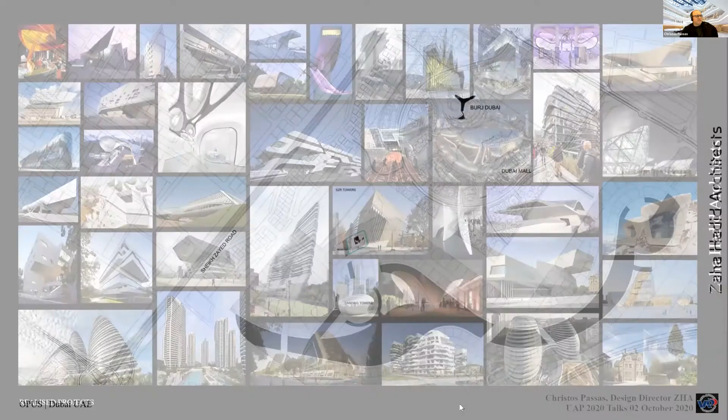So I'm going to go a slide back to show what I was speaking about before, which is the portfolio of our projects. As you can see, each one of them is a unique architectural expression — the Business Bay with the creek that allows all of these buildings to have a good community of buildings around the water. And this is the Opus, in close proximity to the #1 landmark in Dubai.

What I was saying is that the city of Dubai decided to allow for ample space around the Opus, and that gives it a certain privileged position within the urban fabric of Dubai.

When we first started, this relationship between the Burj Khalifa and the extended urban fabric of the city necessitated a project that we thought should be unique. If you look at some of the buildings next to it, they're still characterized by the initial master plan developed for Business Bay, where each building on these lots was meant to have a parking podium on the base, and then a tower or two towers sitting on that podium. That's where the architectural story of the Opus starts, because this project is all about wanting to eliminate the podium and free the building from that big parking infrastructure, allowing it, for the first time, to be a freer, freestanding building.

The idea was to take the two towers, which were part of the original master planning document, and instead of doing a twin tower project — the planning conditions would have allowed us to build a project 30 stories high, with two towers on either side of the atrium, as you see here.

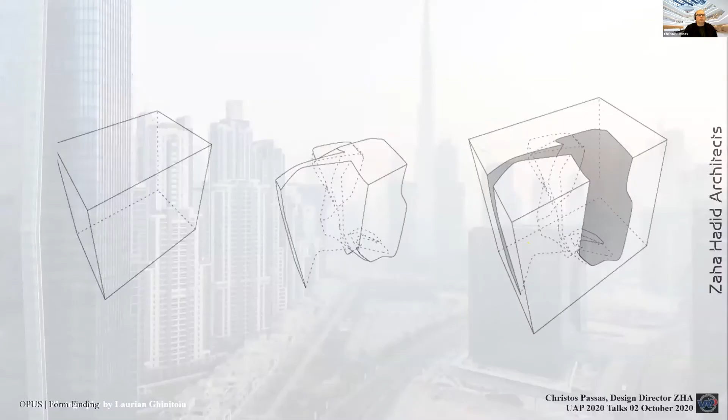Instead, we decided to depress the overall height of the building, and by creating a bridge and a connected podium roof on the bottom side, we were able to achieve a building that appears more like a cube sculpted with a void. That allowed us to create an object that speaks about a number of things, but predominantly about this relationship between solid and void — those two eternal opposites that are always in some sort of coexistence.

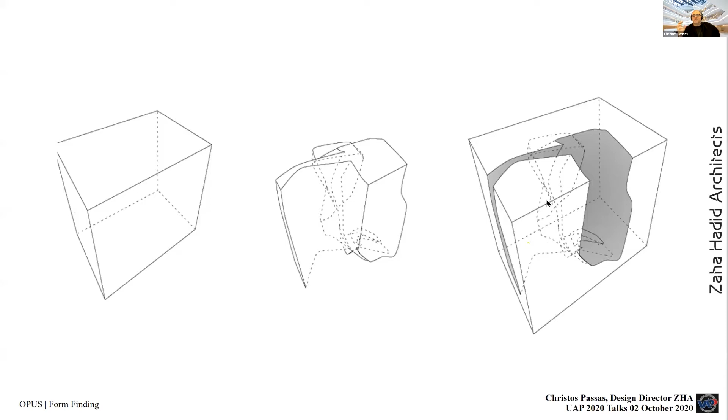What we feel this project does is also use its own form to create a certain amount of self-shading, which is important for Dubai. But also in retrospect, and I'm thinking about this more and more now, having been with this project for almost 15 years, is how it's also a kind of prototype of a three-dimensional urbanism.

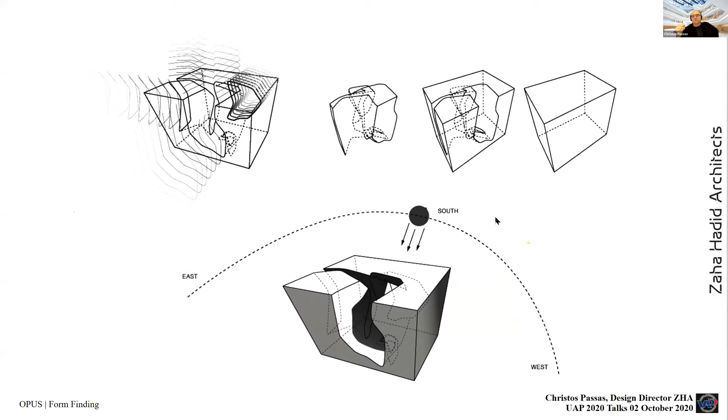This bridge that connects the view between the two sides of the building gives us the opportunity to think about this as a loop — a sectional loop that allows the movement of people inside this building to use it as a continuum instead of a dead end structure like a tower.

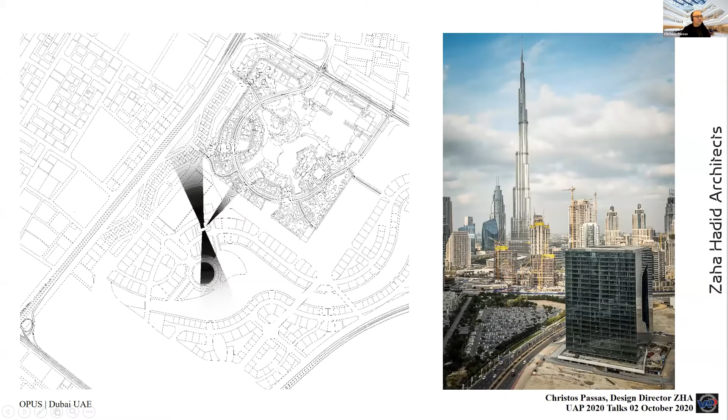And of course, the placement of the void allows us to see north and south — through to the desert on the south side, and through to the sea on the north side — and with the windows on the side, we could also take a view toward the Burj Khalifa, so we could enjoy these spectacular views toward that incredible monument.

Another aspect in the design of the Opus is also its facade. Besides the void and solid contrast, which was a very interesting instrument for us to give sculptural form to what is otherwise a simpler volume, there was also the treatment of the facade.

From very early on, we started experimenting with ideas of facade as effect, but also facade as a veil and as a reflective element that would enable us to increase the solar insulation of the building from solar radiation, to an extent, to enable this building to have a kind of an all-glass facade, but one that is articulated and ever changing.

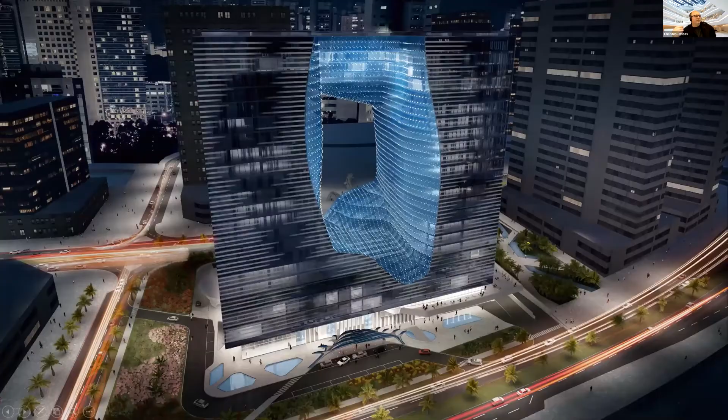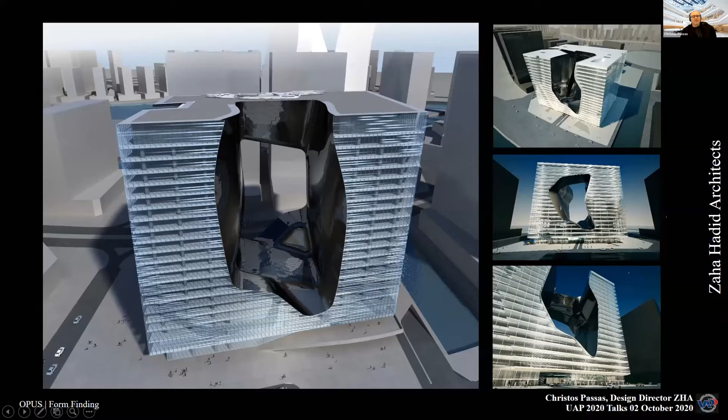It becomes an element of light, an element of visibility, versus the daytime, where you have a volume that is much more visible as a solid volume during the day. That relationship between the void and the solid, the day and the night, is a theme that we've played on quite a lot, and within that, the idea of the highly defined geometrical edges that hold the project together gives this extra meaningfulness and significance.

These are some test models that we've done once the concept of the project was finished, and that shows the cube as a chromed object with a series of self-reflections appearing onto its void.

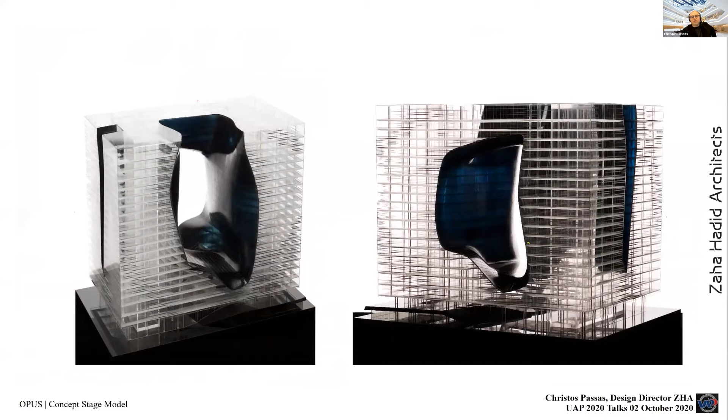I think that is also important when we come to speak about how the facade was developed. This is another model that shows the structure, the floor layout, how the building internally is organized and proposed.

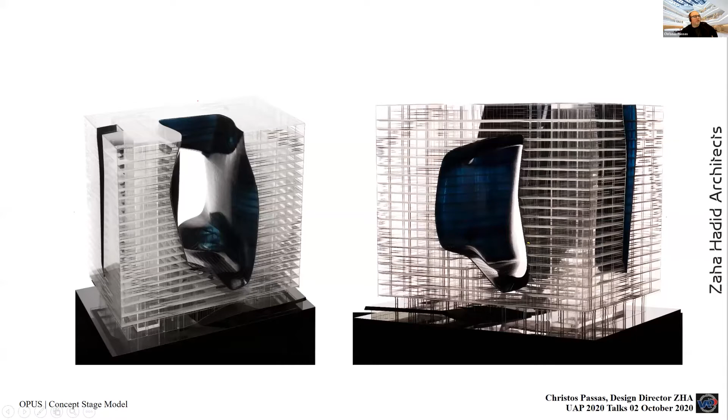We're speaking about a kind of a domino system, but except at the edges, and the point of incidence together with that internal void becomes a point of interest where all of those columns begin to bend, and all the slabs begin to take curvilinear form out of the shape of the void. That is to say, from an architectural or tectonic point of view, that void is a matter of design, both in terms of rationalizing the facade, rationalizing the interior of the spaces, and thinking about how the whole building is developed.

Originally we had started with the Opus as a building that would have a retail zone on the ground floor, and that was actually quite important for the client. This is a roofless plan of the two levels on the ground that were to host a series of shops and other public facilities. That was important for us because it would reinvigorate the idea of the sidewalk and make the building approachable, rather than unapproachable, by the placement of those parking lots in the podium that I spoke about earlier.

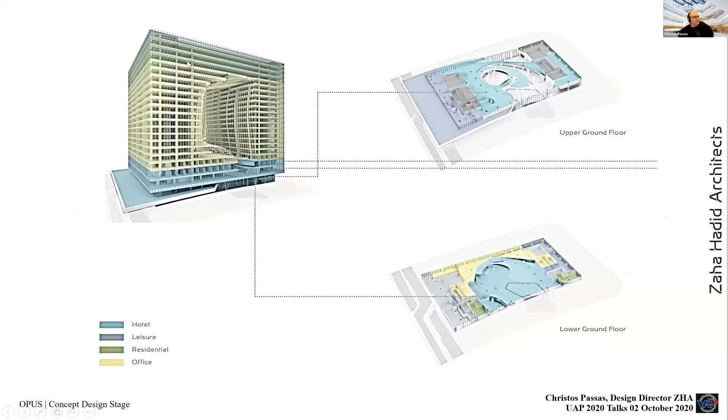Above the podium levels, we had a number of floors here in yellow that show the areas where the offices are developed, and then at the very top we had penthouses and so on. Later on, during the course of the development of the project, the client decided to transform the ground level and install a hotel function, which was equally interesting in terms of its public urban space outlook, and transform the penthouses into a series of service apartments at the very top.

So we went through the building volume at that point, and we looked at how this three-dimensional building structure, or three-dimensional urbanism — the office zones, the hotel zones, the apartment zones — are all becoming one mechanism that allows this building to tick-tock during the day.

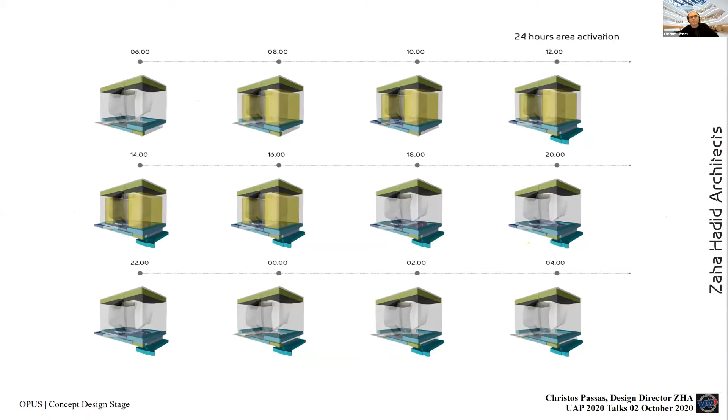Looking at it more carefully — this is an instrument we usually do to understand the buildings we design better — was also how the building functions over a 24-hour cycle. We do this both with our master plans and with our buildings now, to understand how the flow of people through the building begins to change, and what areas become more active or less active during particular hours of the day.

Here we have a section that shows essentially the solution to how to build such a project. This section is quite crucial. It's a very interesting drawing from the point of view that it does lay the whole structure of the Opus bare to see, and the overall building is sitting on a raft foundation.

It has a number of basement parking levels. This was the podium that was supposed to be above ground before, and we depressed it into the ground. There are some loading facilities here in the back, but the main atrium was always part of the main features of the Opus, and this was a sort of space of surprise, entering into the building and discovering what the Opus was about. What's interesting about this atrium is that the glass roof on level 3, 4, 5 can allow you to see through over to the bridge and all the way up to the sky from this point down here.

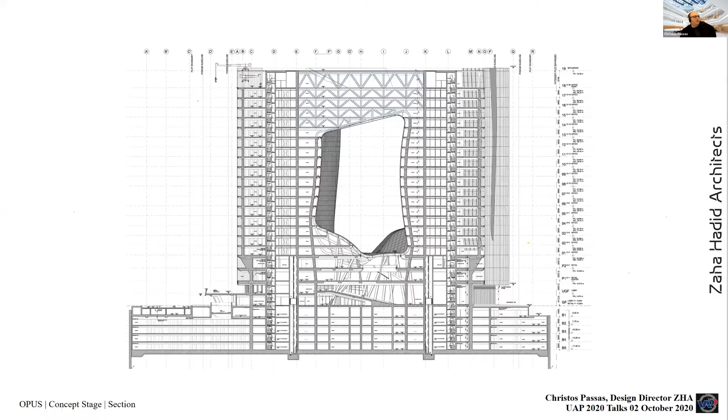The two towers are connected by a bridge. This is a living bridge, meaning it's a bridge that is occupied with apartments, so that those apartments have views on either side of the bridge looking up, and the overall outlook of this building obviously looks something like this.

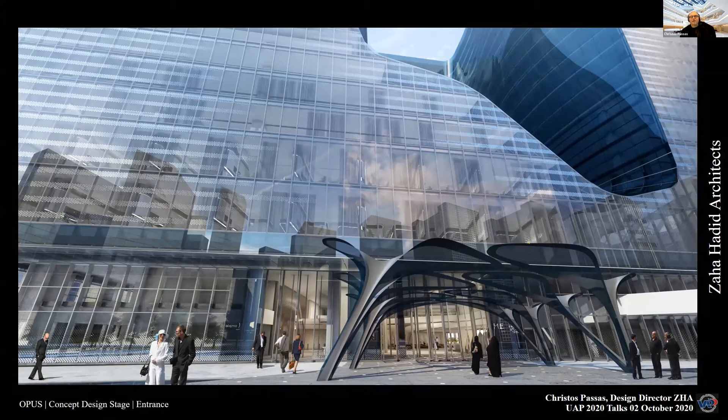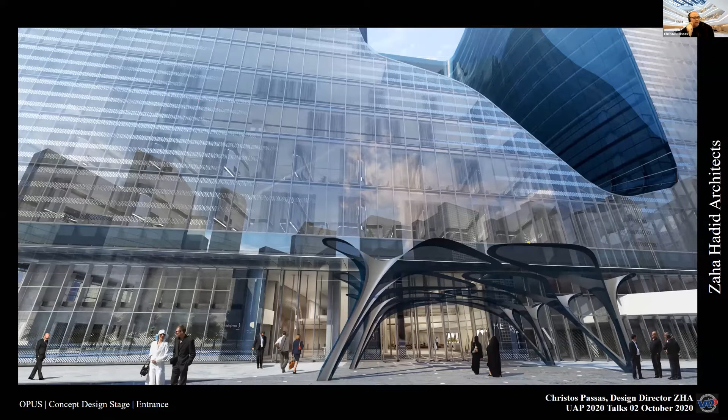The entrances, in this case, we've done a lot of designs for this project along the way of its 12-year development, and we tested different ideas. In this particular case, what you can see is a very thin metallic and mesh structure that was painted black, and it was almost like a series of palm leaves overarching onto each other and creating shade on the ground for the drop-off area of the hotel, while at the same time being very thin so that they don't absorb a lot of heat from the sun in Dubai.

So it was also a way to make sure that we develop a kind of component that would be very easily cooled down and not absorb a lot of heat, a lot of energy from the sun.

And of course, it is looking into how entering this building, obviously under this big void, this void would work, and that brings me to the idea of the facade and the fritted facade, a facade which is almost—I talk about it as if it's a sort of an artwork.

On this building, we first started with very timid kind of drawings, how to proliferate a series of dots and find a way to fade them so that we can create variation and diversity on the way that the facade could work. But of course, making an artwork on a whole building is not an easy exercise.

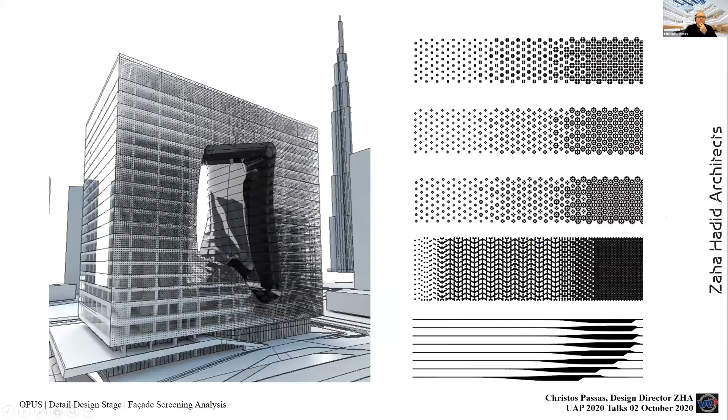So taking you back to the beginning, this was the original drawing we had developed. This beautiful drawing where you see all the lines and the movement and the interruptions through allowed us to look at the void as almost like a kind of a black hole that absorbs these lines going into it. So it's a kind of an astronomical approach, but also appears almost like a weather map.

So these lines are constantly flowing and moving around, and they create consistent—what we later came to call parametric—smoothness, but at the same time having a little bit of points of intensity, points of sudden rupture, and in a way, transition from one side to the other.

So you can see also these lines here, as much as you can see the smoothness and the transition of these lines. And of course, in rationalizing this and digitizing it in a way...

This painting of sorts, this artwork, we also came to this conclusion. This is an unfolding of the facade of the four sides of the cube. And remember what I was telling you earlier about the rationalization of those fritting patterns.

Well, actually, this is a drawing that sits behind. It's a digital drawing that describes every color, describes the kind of stencil we use to produce this very kind of unique artwork. Essentially, we developed 28 stencils, 28 unique prints that we mixed and matched and organized, composed onto this facade, so that we can develop this effect.

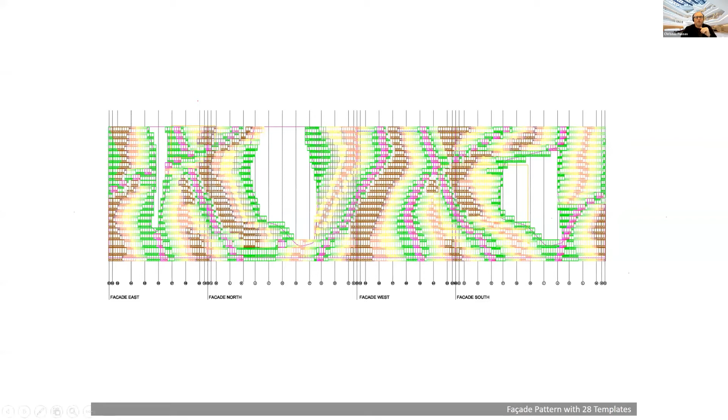What this suggests is that the Opus has a facade that plays the game between reflection and transparency at the same time. You will see it in some of the later images, it has this very interesting ability to reflect the surrounding environment around it, but at the same time allow you to see within it. So it's neither a pure mirror nor a piece of clear glass, it sits in that in-between zone. We found that very fascinating as a scheme, and that's why we proposed it. The client liked it, and I think it does a lot with the building.

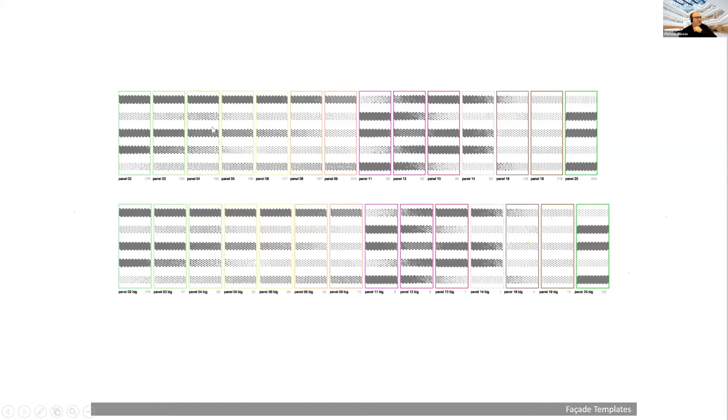Now, digital tools were not always as advanced as we have today, and of course the thing with digital tools is that they're always advancing. The project we'd done previously to the Opus, the Phaeno Science Center, we also couldn't find perfect tools for what we wanted to do. So every project for us is a bit of an intense point of intention and tension with what's available in terms of software.

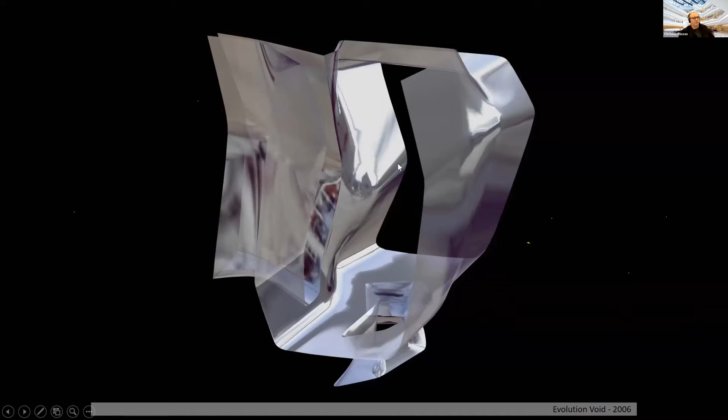What we wanted to do here in this particular case was to take the volume of the surface of the void and begin to rationalize it into a feasible, constructible, buildable proposition. These first silver drawings allow us to see two things: first, how it gives us more clarity on how the surface bends, but at the same time it gives us an opportunity to see how the reflections on this surface begin to play out, so we can have smooth reflections throughout the project.

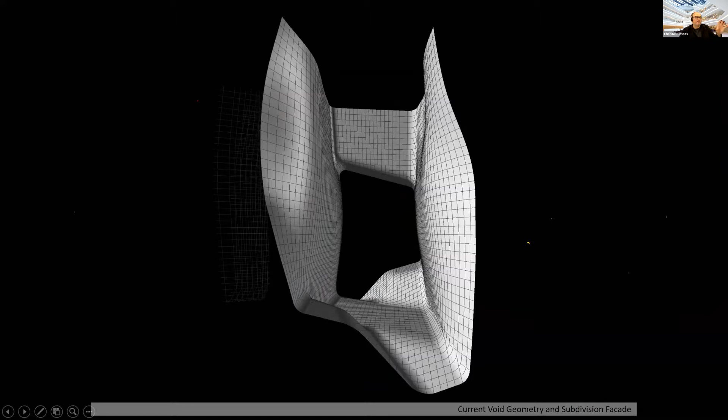You can look at the drawing like this, and this is the rationalized version of that void. You can see the strict rationality and geometrical discipline that goes into developing an object like this. But at the same time, this will not show you the reflections. We had to design and review both of those elements in making this facade what it is.

Speaking about the surface analysis first, we used a lot of analytical tools to create a kind of system for achieving material economy and reducing the complexity of this project. Where you see red lines, red panels, red surfaces here, this is where the panels are completely flat. The blue panels are singly curved, and the green ones is where we may have double curvature in the building.

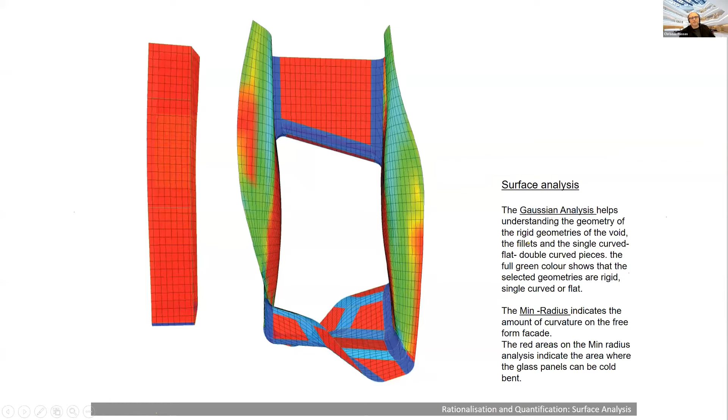Because this is a free form, we wanted to make the statistics of this in such a way that the doubly curved glasses are limited to the absolute minimum. I think we managed to get it down to 10 or 12%. We had about 20% single curved pieces, which are a lot less expensive to make, and the other 65% of the facade glass was all flat glass. This made it feasible, and made it possible for the client to approve it and say yes.

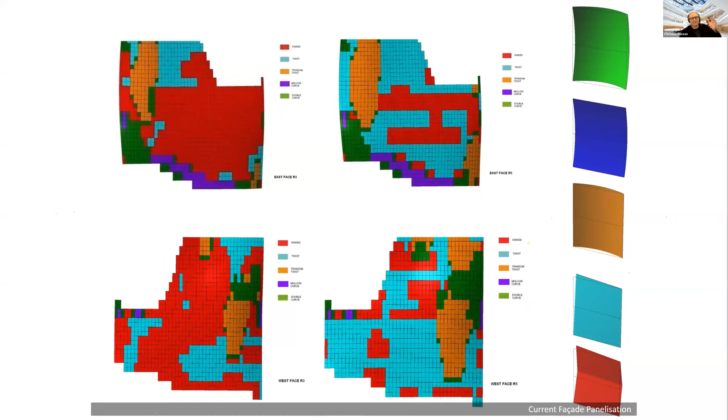So we went through a few cycles of these. We did the so-called Gaussian analysis so that we can test which regions needed to be designed how. But also, quite importantly, we looked at ways to facet the glasses so we could get further economy without necessarily compromising the reflectivity aspects of the facade. This is one of the ways we thought about panel size and the maximum bends.

Cold bending was one of the techniques we used. This is now widely employed by contractors and architects in many different buildings. But we also did another thing.

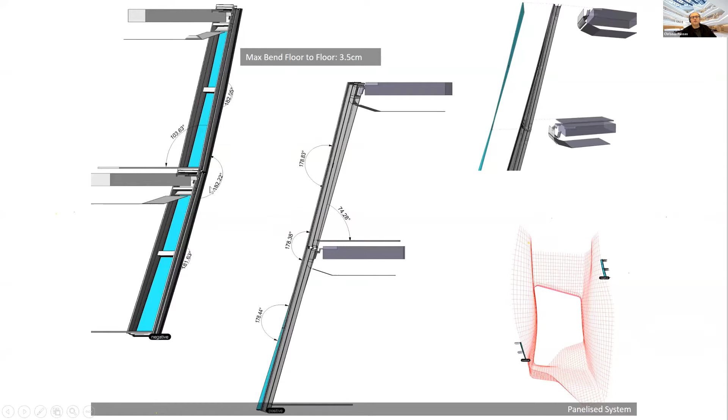In order to be able to deal successfully with the reflection that this building would produce, we did a big number of photorealistic analyses. The photorealistic analysis was allowing us to test when we have two pieces of glass that are flat, or even flat and cold bent, meaning warped in a way, what would be the maximum angle that we could break the two pieces of glass so that we can have visually smooth reflection. The numbers you see here are the outcome of that condition, suggesting that if we break a glass up to 2 to 2.5 degrees, then that would give an overall smoothness to the object that would be almost imperceptible to the human eye. And that gave us a lot of additional visibility into the overall object.

Later on, when the design was almost finished, we started testing these, and we started seeing, especially in the two images on the right-hand side, how the reflectivity of the glass begins to play an interesting game in shade and shadow in terms of how it reflects and how it becomes transparent. At the same time, the faceting of the glasses, how it comes together to create something that is faceted, but at the same time, in the bigger view of things, becomes actually very nicely smooth. You can see the results here. It's quite nice the way that's been done, isn't it?

So this was a lot to do with this facade story, and a lot of our time actually went into developing these features of the facade.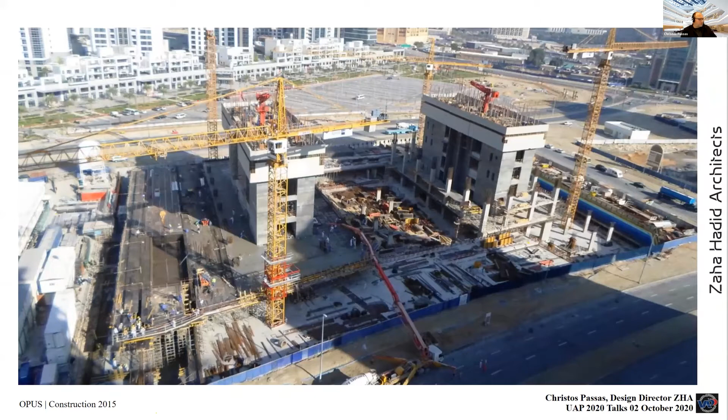Taking you back a little bit, I wanted to speak about the concrete work as well. This is the building after the basement was finished, so here we are almost nearly on the ground level. All the basement levels have been built. The building has two cores that were lifted up with moving formwork as the construction went through.

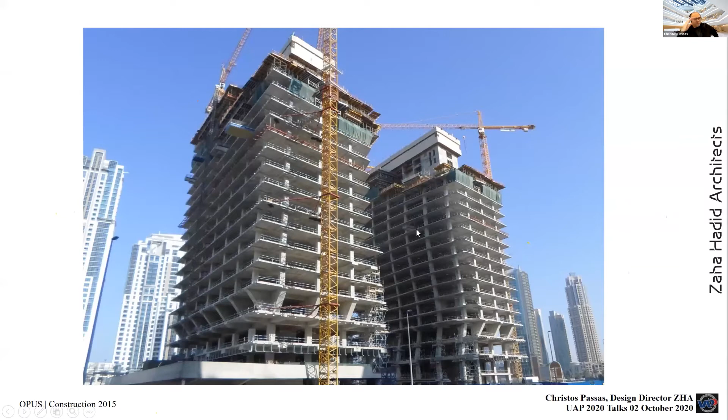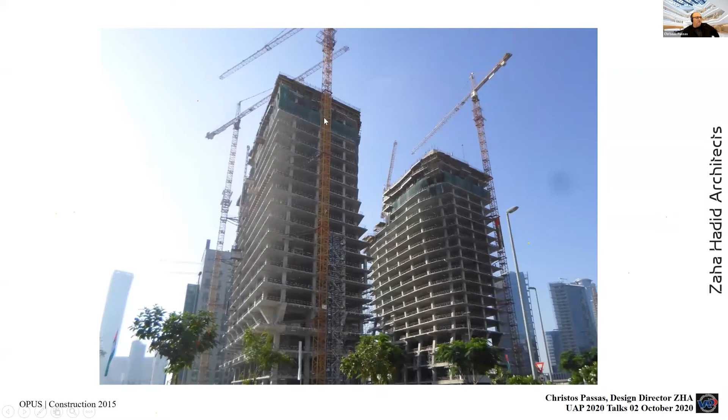Here you can see how the building looked like when it was under construction. You can recognize these V-shaped transfer zones where the external columns of the building shift and turn into the inner waist of the building to allow the cube form to float over the ground. You can also see the columns, how they bend and adapt to the flexing of that facade, and how these two towers essentially came together to create that one whole that we know today as the Opus.

Then this is a photograph during the installation of the facade, and this makes the point of how the building reflects and makes transparent the environment that it sits in. This effect is essentially a zero thickness effect that reflects and allows light to go through.

You can see here one more feature of the building where all the columns were set back by 2 meters inside the office spaces, so that the facade remains uninterrupted from bay to bay to bay to bay. That also allowed us to optimize essentially the visual lines from inside the building toward the outside. So whether you have cubicle offices, subdivisions, or whether you have open plan offices, this architectural approach gives you much better visibility toward the outside.

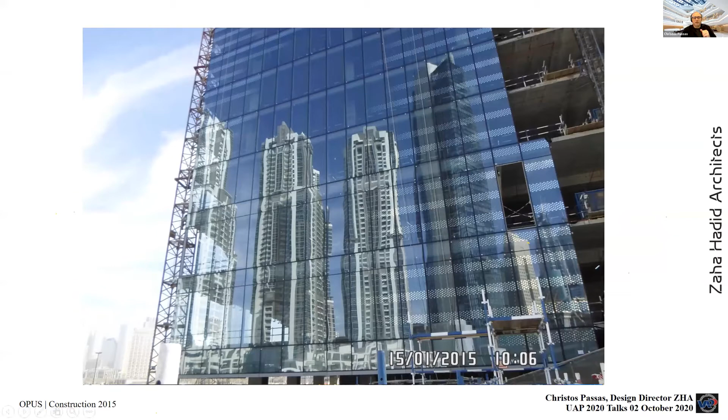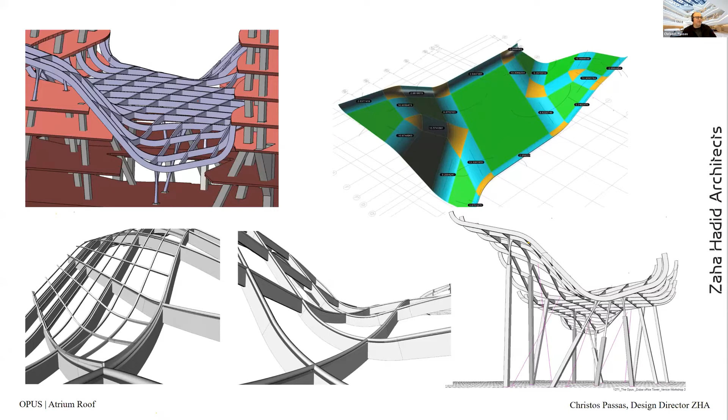Moving on, I spoke about the atrium a little bit earlier, and of course the roof of the atrium is something that also underwent quite a significant number of iterations and development. In this case, you're seeing the trellis, the steel trellis that is basically holding this roof up. Although in Dubai it only rains once a year, if so, we still had to design a roof that would be able to deal with gushing water whenever that happens. At the same time, one of our other concerns was that when we are building up this trellis, we wanted to allow for maximum visibility from inside the space to the outside.

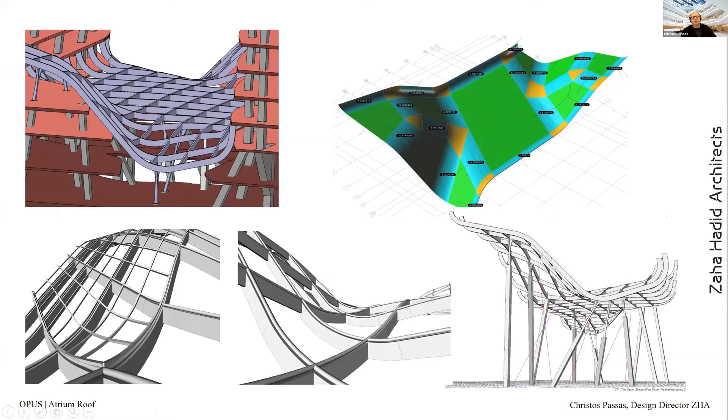So instead of making all the elements of this deformed grid into equal uniform members, we created primary members and secondary members so that we can increase the support span to 9 by 9 meters, as you can see on the lower left-hand side image, and then have 9 pieces of glass with thinner profiles within it, so that we have a much thinner kind of structure and visibility through. Of course, a lot of digital design and fabrication went into the making of this project.

The client and the operator, Meliá Hotels, one of the most wonderful hotel brands in the world, because their hotels are always very exciting and semi-casual, and you feel free when you go to them. They have a very nice feel to them. So what we wanted to do for them was develop a set of balconies that would allow people to sit on these edges and overlook this big atrium space.

This is what the end result looks like. You can begin to see on the ground floor the glossy white marble surface, and also the Ottoman lounges, which we designed as bespoke furniture pieces by selecting colors and combinations of colors to give a sort of look and feel of an arabesque lounge, and a space where people can feel comfortable to sit, meet their friends, but at the same time not be in one huge space.

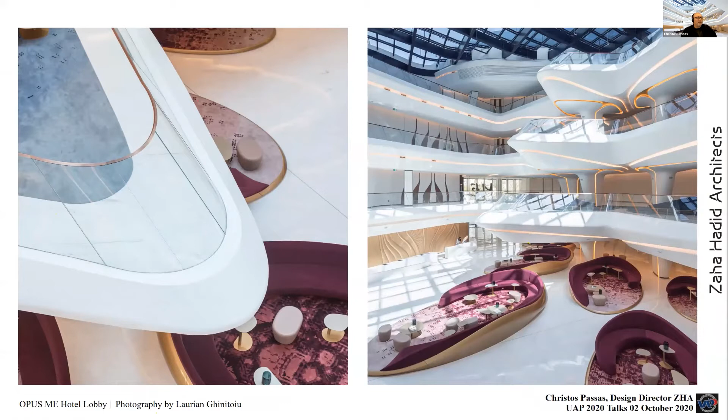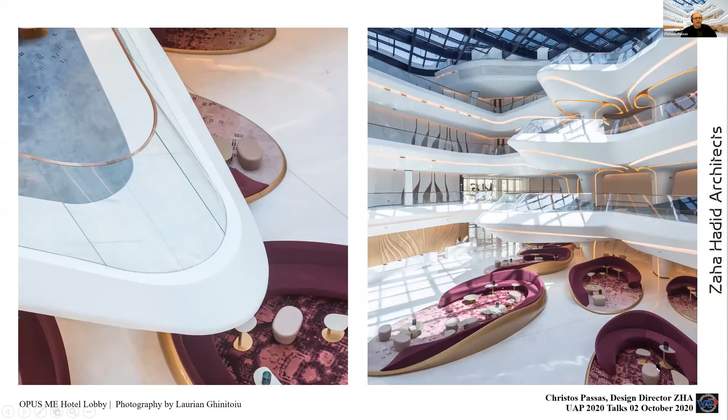These are wider views of that atrium, and you can see the roof as I told you about before, and you can certainly see through. What is essentially this atrium is represented by this white set of flower petals, like a white bouquet of lilies, and in a way sits over this beautiful airy lobby in the middle of the hotel.

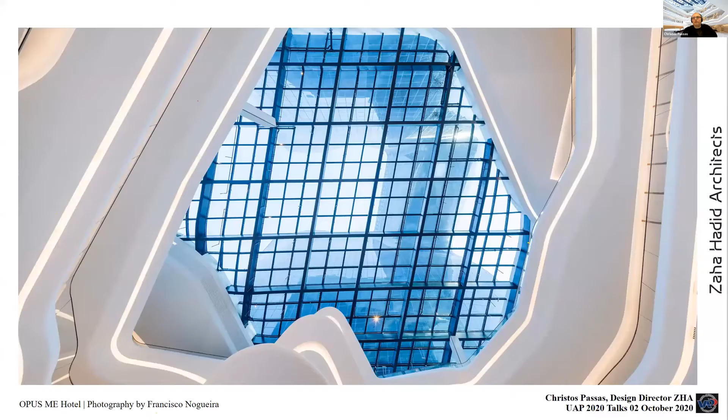So that was during construction. This is now the final result. And when looking up inside this building, you get this kind of sense of the three-dimensionality of the building, even from this very much entry space.

Something more about the facade, but also the swimming pool of the Opus, which goes hand in hand with the hotel. The corridors to the room, so we go from a very wide, bright, airy and lofty space into a series of corridors that are much more dim in terms of light, with beautiful wood veneer on the surfaces of the walls, and bronze and pink champagne gold trimmings on the surfaces as you go into the room. The logic here was to create a sense of hardness to softness.

So it's again about that transition from one opposite to the other, where the guest to the hotel moves from this kind of space, which is much more airy and wide and more marble-like, into this kind of space, which is much softer, with carpet on the floor and wood veneer and so on.

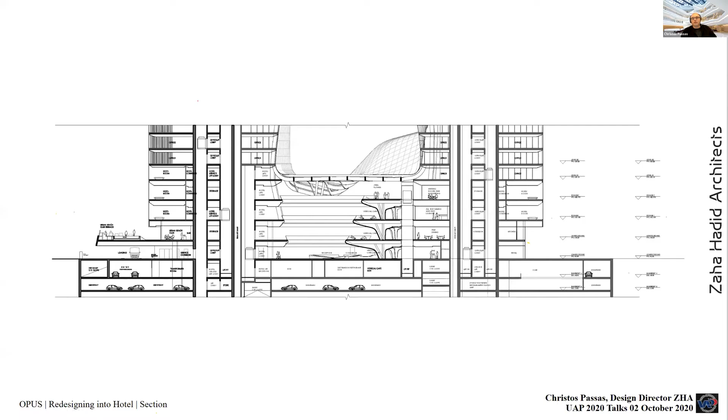So yeah, the atrium, the section of the atrium in this case, so you can see the white flower overlooking into the main atrium. These decks become the reception area. Then you have a cafe, then a patisserie, and then a space for events all the way at the top, where you can play music or invite a DJ who can stand on that balcony. So there's a series of projections into the space that allow the hotelier to use them in different ways that they may want.

One of the more practical, constructive views of this space and how it looked during construction, with a myriad of steel elements coming together, making sure we have the possibility to develop something like this. This is one of our renderings, what we had originally proposed, and you can see here how it was developed and executed in a very nice way.

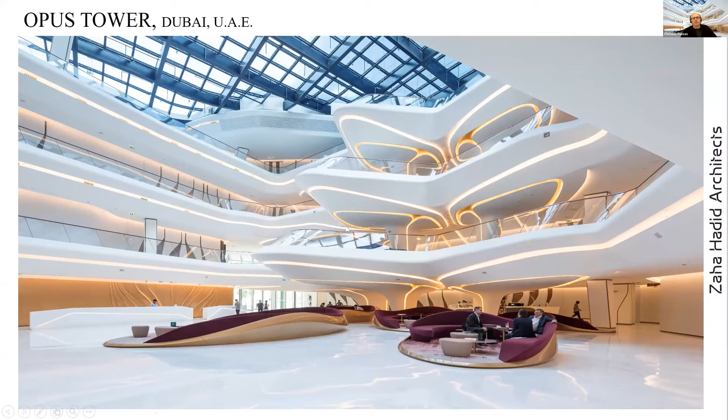You may also notice behind these white walls a series of treatments on the facade. These are kind of bronze pieces of glass that are basically showing us the entrances into what is essentially the restaurants, the club and the patisserie in the areas of the hotel.

Somebody is writing on the screen. That brings us into... I don't know, can you see my mouse when I'm pointing at this at all, Christian? Is that visible? Yes, it is.

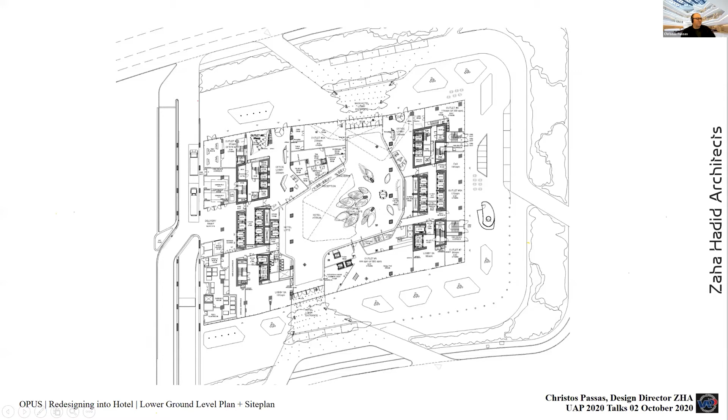The spaces adjacent to these are outlets. So essentially we have a number of outlets for steakhouses and cocktail bars, a very nice Italian restaurant, etc., occupying the spaces. They are accessible both from the outside and from the inside of the space itself.

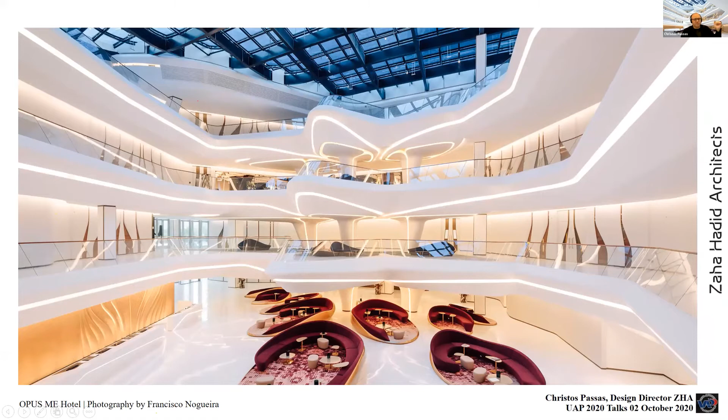So all of these levels, now in these photographs the hotel is of course empty for the photography, but you can imagine this place full of guests and how those columns begin to define the space.

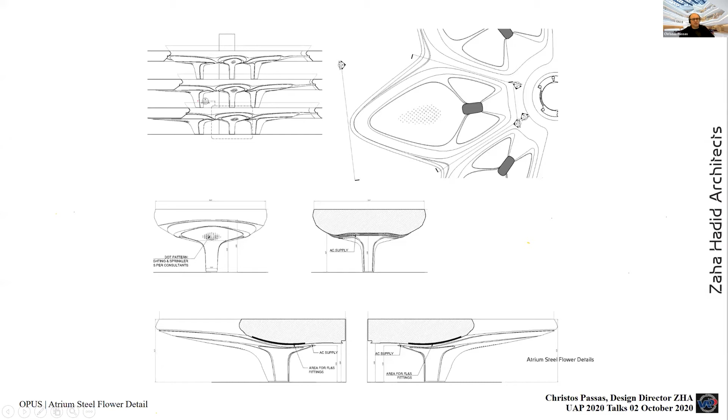I think this is also one of the aspects I wanted to speak about. We developed this design as a way to give a little bit of hue and definition to the whiteness of the form. Each one of these shadow gaps you see here essentially becomes part of the lighting lines installed in the building and how they light up the whole building.

These were developed with white LEDs, but inside each one of those coves there is hand-painted pink gold highlight so that it can treat the color and make it a little bit more yellowish. This is also quite visible here. You can see this is the all-day dining opening out into the terrace and underneath the atrium.

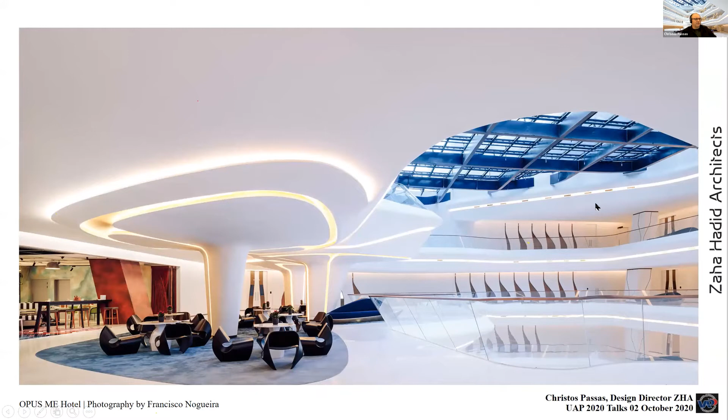So the space we've been discussing can be used both for hotel activities, movement of people, restaurants, people sitting, dining, or speaking to each other, etc.

But at the same time, this space also forms quite a beautiful gallery that can become a cultural space. I think one of the ambitions of Mr. Amjad is to turn this into a cultural space and invite artists to make installations inside here, creating an ongoing program of events that will always give character to this space.

And of course, within it, part of the exercise we had done to reinforce this approach was to design a series of bespoke elements. In this case, these are called the petalinas. They're essentially sofas, but the whole furniture fit-out of the Opus is developed on the basis of these aquatic life forms, whether they are like petalinas or these kind of sea flowers here, that all come together into one ecosystem.

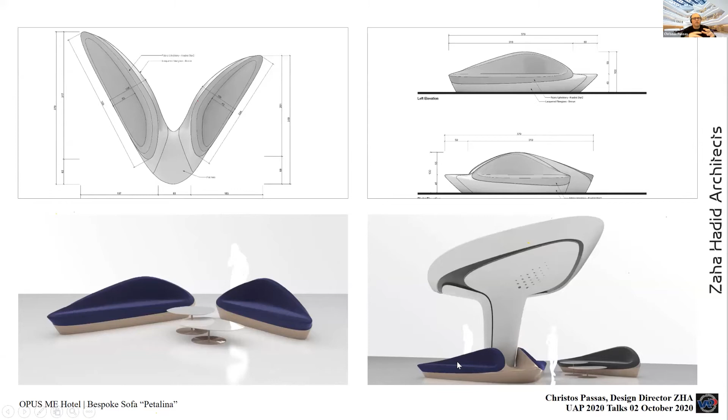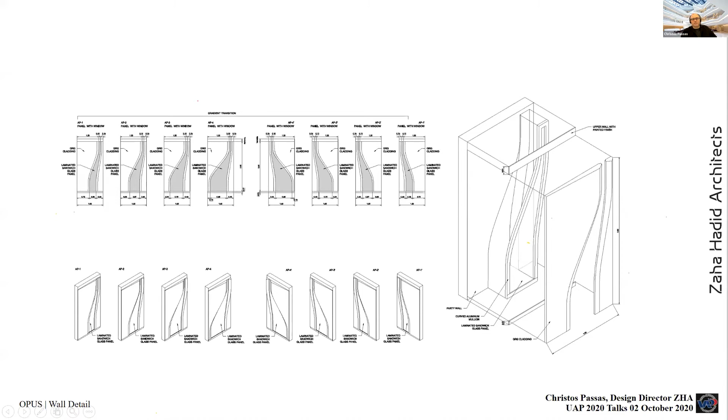On the other hand, these are the technical designs for the doors that give us orientation toward the restaurants. And of course you will see, and possibly recognize, the pointy arches. Each one of these creates a kind of dome structure that signifies the entrances into those spaces.

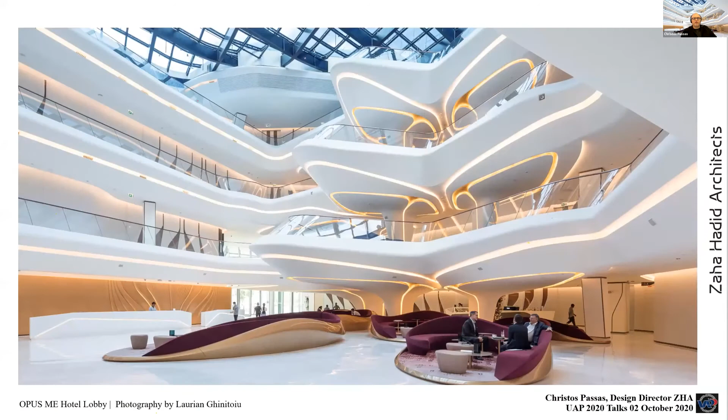So the hotel, and from here you can also see the Arabesque Lounge, where we've developed these pods that are carpeted, and one can take their shoes off when going up onto the pod and sit down.

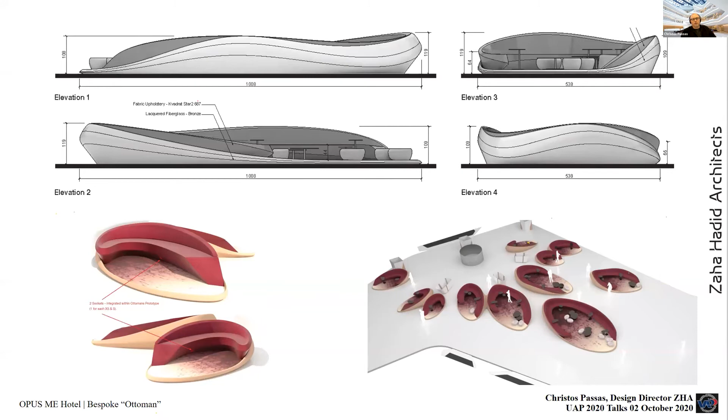So we created these as places where you can have companies of people, groups of friends coming together to sit, or if there's a little informal meeting, or if you're expecting to receive someone, you also have your own little pod, your own little territory. This enables people to come together rather than having these big, blank, endless hotel lounges. So we wanted to create a spirit of intimacy here.

So warmer colors. We wanted the staff to be easily visible and accessible, but at the same time not intimidating. We've designed the reception desks with marble, with integrated lighting inside, and a lot of integration of computer screens, touch screens, and so on in there.

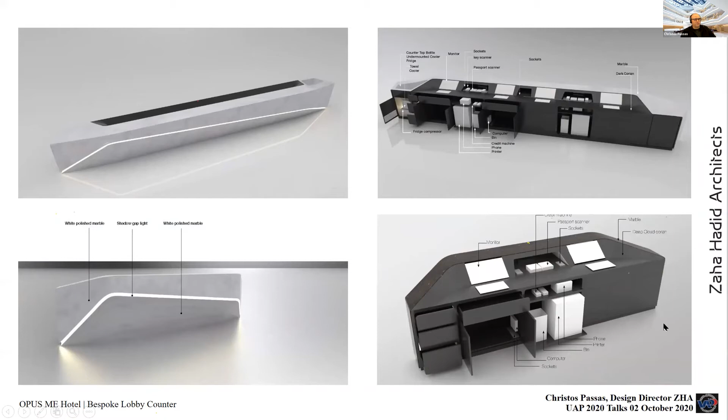So we went to this kind of extent and degree to be able to develop something that is as clean as this. A lot of work, from highly conceptual work to very, very detailed and articulating work, to make sure that the result is nice, clean, and simplified.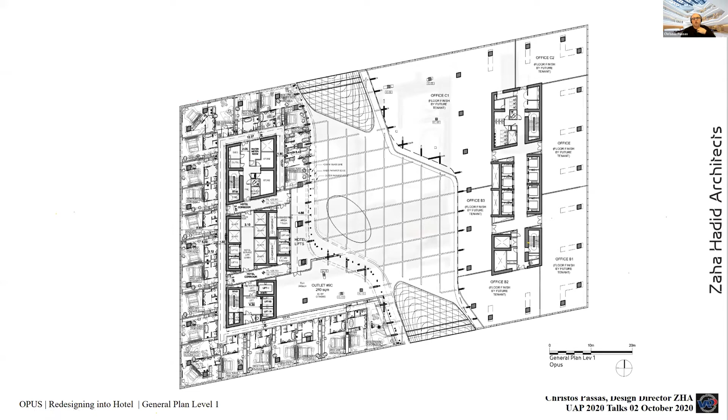So these designs were developed taking into account the hotel operator's brief: smaller standard rooms called auras, vibe rooms which are slightly larger standard rooms, and then the junior suites at the corners. This is the vibe room, which is the largest of the standard rooms.

And here, the take we had was that we wanted to give a big and luxurious bathroom to each one of these standard units. We had the so-called maxi bar and the bed that we designed. We also designed the sofa bed for the rooms, but it was later removed to allow more space in the bedroom itself.

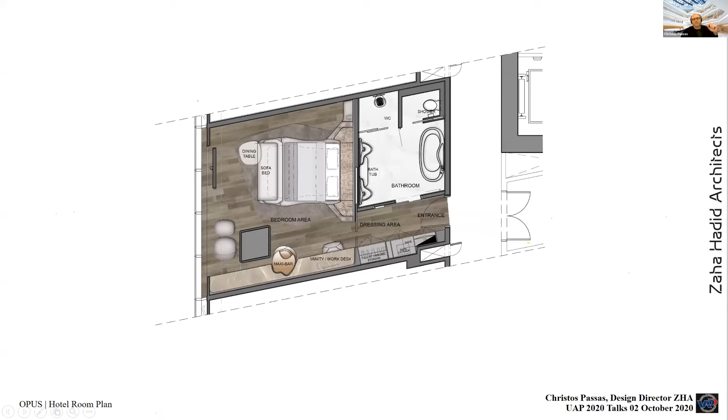We also developed two types of bathrooms, one in black marble, the other in white marble. We took the initiative to contact one of our trusted suppliers, Porcelanosa, and developed together with them this bathroom range, one of our first complete series of products, where we developed the bathroom, wash basins, shower, bidet and toilet all as one set of objects. The Opus features this product line as our first project on the market.

So the design of the rooms is something we've taken a lot of consideration in, looking into different ways to organize them so they're simple and clean. We've designed the bed and also the backboard behind it, finely textured wallpaper on the wall, and marble slabs on the counters sitting over walnut effect cabinetry. So the rooms were developed in two conditions.

One was the midnight desert, where we chose blue tones almost close to black, and also slightly beige tones to show the locale.

And in this case, this is the other version of the hotel rooms, called an Aurora themed room, which deals with a different set of colors, but also being a suite, the bathroom here is in a much larger space. The bed opens out through the corner, overlooking Dubai and the area of the business bay.

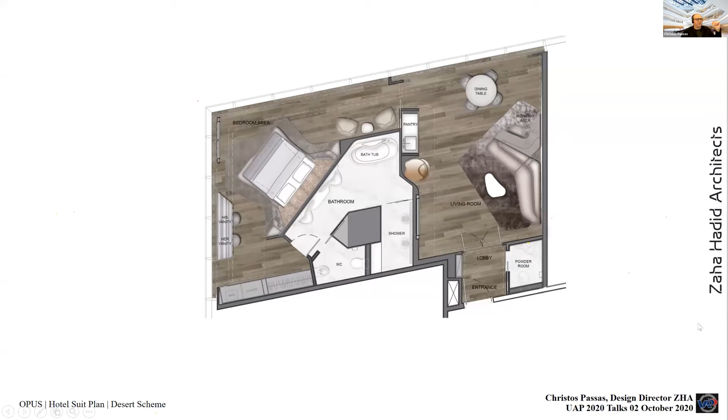We also designed these work and play pieces of furniture to create a unique piece that would be both for work—the desk adapted to this particular room and place—and play sofas where you could sit, relax and recreate during your stay. This is another type of room, using the same bed with slightly different colors, a different graphic on the wall, and a slightly lighter palette.

And this is the end result and what it looks like. The bed, which was always of primary importance to the design, and especially for the hotelier, is the number one feature of every hotel room.

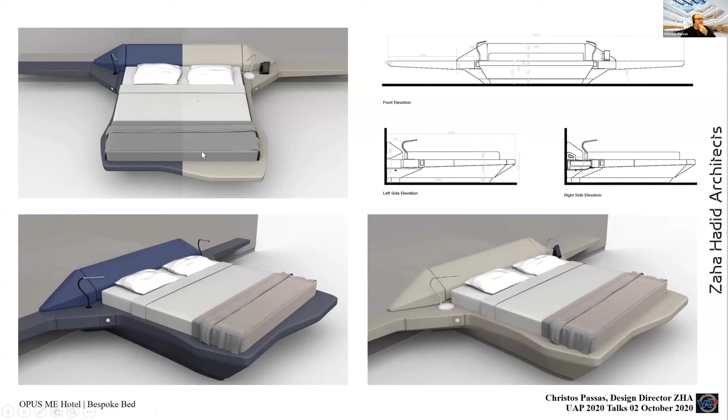So we paid particular attention to integrating a lot of technology inside the frame of the bed, and to allow for this backrest, which instead of being vertical, we placed at an incline, so you can rest back on the bed, or pull it up a little to make it more vertical for back support. Here you can see the two different colors, the darker blue and the lighter beige, for the different types of bedrooms.

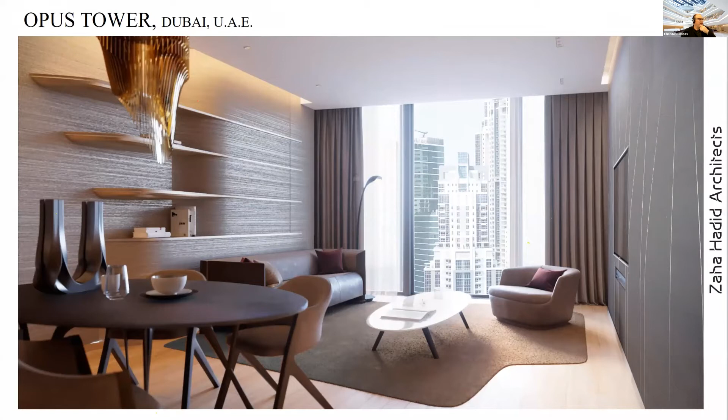These are some of the living rooms in the suites and apartments, where you can see the shelving design. These are the slump chandeliers—the version used in the Opus is the gold version, designed specifically for this project. Some of our ZHD pieces.

These are the candelabras, the carpet on the floor, which is cut back a little so it allows the door to open and entering into the bedroom.

And this is the Opus sofa, which was designed with the form of the hotel, of the building, in mind, and then it later became also a product for the project itself. So, simple spaces, but with nicely finished, nicely selected furnitures and bespoke designs inside.

And this is another version of the room.

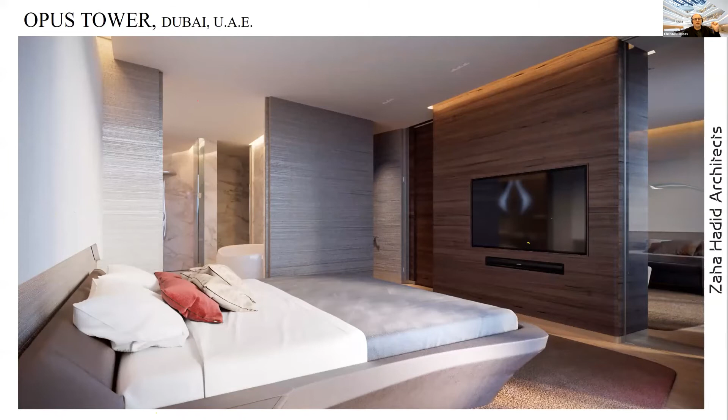And another one of the types of rooms here with all the walnut veneers on the walls, allowing glass subdivisions between the living room and the bedroom to allow for more transparency and light coming in through the facade, the bathroom in the back, and the walk-in closet there on the side.

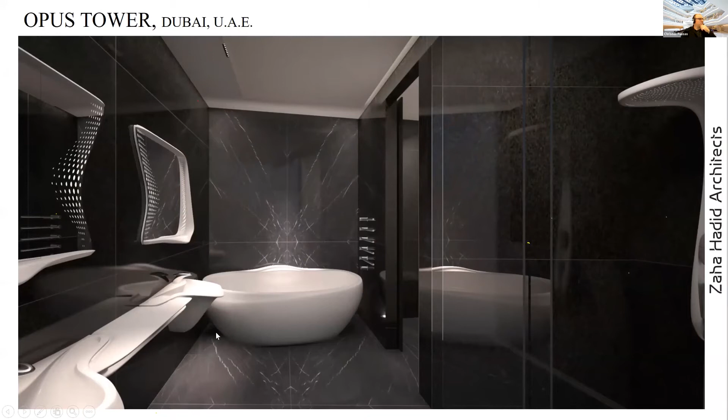So talking about bathrooms, this is the Opus bathrooms with the mirrors designed. These are all Vitae range by Porcelanosa products, and these were all designed by ZHA to have these kind of elongated wash basins that appear like corals, and a kind of nickel chromed tap at the top, activated with a sensor, a bathtub that looks like an oyster shell featuring an overflow to fill in the bathtub.

Here on the right hand side is the shower with a fixed shower head, but it creates a kind of rain effect. Really a simplified design with book matching pieces of marble, so that we can have a very simple and fine experience.

So from the rendering to the actual result, here you can see the design and the mirrors, and how the whole thing comes together in a hotel setup, with the cosmetics in place, and the reflection on the marble was also quite important. And this is the set, and that's the final result.

And in a nutshell, I think this brings us to a close. This is the Opus, inside and out, looking at itself and looking at the environment. I think, yes, as I said in the beginning, we're very proud to have accomplished this project, and it's been a labor of love for a number of years.

But I think the results of this are due to Zaha, of course, but also to Patrick Schumacher and all the people, from 100 or so people who worked on this project over the years. Both HBA, who worked with us on the interior design, the local architects, BSBG, BG&E, who were the structural engineers, Agnes Koltay and Koltay Facades, who has been with this project since the beginning, and also the contractor Brookfield Multiplex, who's done a great job on this project, and of course the hotel operator Melia, who are very forward-looking people, and they know the hotel business very well. I could say it's a good match, a very good match for the Opus, and a blessing to have them run this hotel over the next years.

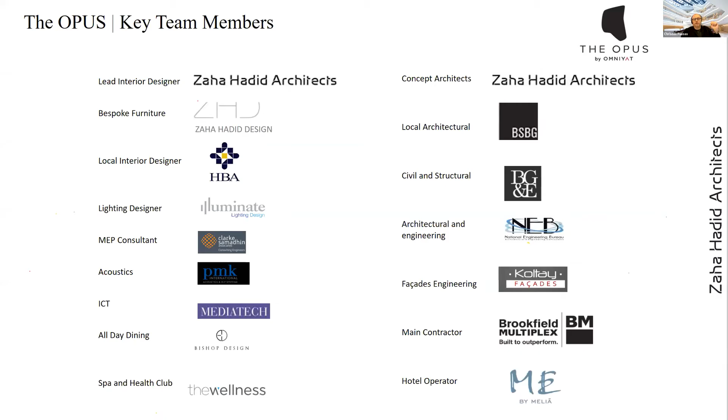As I would like to also thank you, all the Architects chapters who have made this event possible and given me the opportunity to speak to you about this project today. So thank you very much.